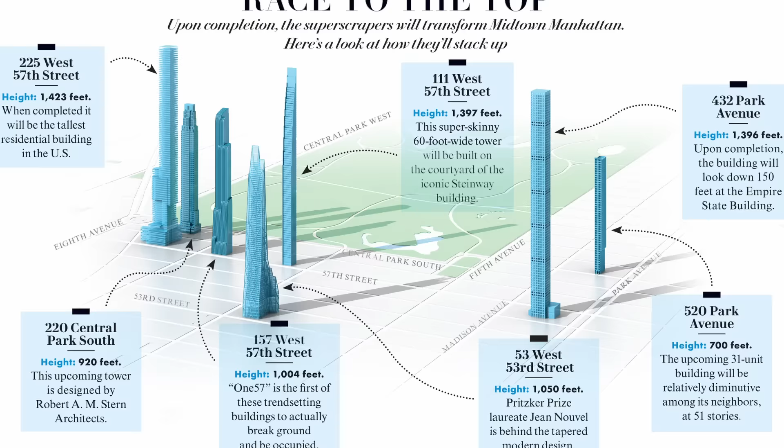If there's one place on Earth where skyscrapers define ambition, it's New York City. And in Manhattan, right along Central Park, a row of ultra-luxury towers has come to symbolize both incredible engineering and spectacular problems. Billionaires Row isn't a single street, but a cluster of super-tall condominiums lining 57th Street and the blocks just south of Central Park, built to attract the global ultra-rich. Apartments here can sell for tens of millions, but just as often, they sit empty.

Billionaires Row has seen record-breaking designs, but also lawsuits, bankruptcies, and towers that sit half-empty. From the creaking walls of 432 Park Avenue to sluggish sales at Central Park Tower, these skyscrapers are as controversial as they are ambitious. And at the very center of this skyline stands one tower that takes the idea of ambition to an entirely new level.

Steinway Tower. A skyscraper that cost more than $2 billion, took 12 years from planning to completion, and somehow managed to become the world's thinnest skyscraper. The fourth tallest building in the United States, and somehow one of its loneliest.

How? Let's find out. The 2000s and 2010s marked a new era for Manhattan's skyline. Developers weren't just competing to build tall, they were competing to build thin. It all started with One57 in 2014, followed quickly by 432 Park Avenue in 2015, a tower so slender it became a global talking point. Together, they sparked the creation of what would soon be nicknamed Billionaires Row, a cluster of ultra-luxury towers along the southern edge of Central Park.

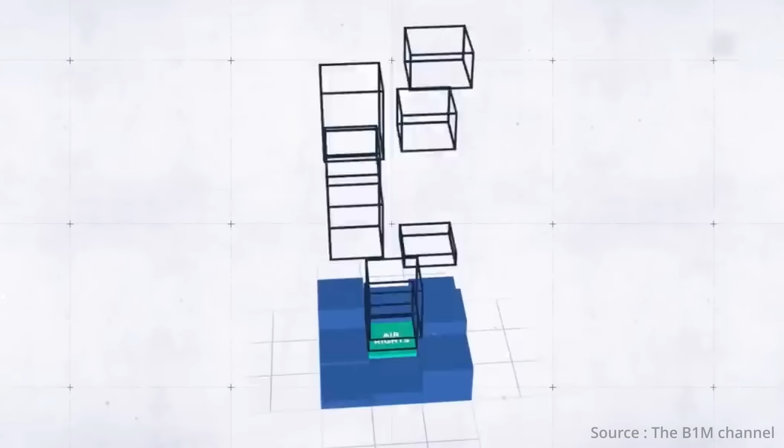But why here? The answer was money. In the years after the global financial crisis, international wealth, from Russian oligarchs to Middle Eastern royalty, poured into Manhattan real estate. These apartments weren't really homes, they were treated as safety deposit boxes in the sky. Developers saw an opening, and thanks to a 2013 zoning change that allowed them to buy air rights from surrounding low-rise buildings, they could suddenly build higher and thinner than ever before.

That's where Steinway Tower comes in. Unlike other towers that started from a clean slate, this one had to rise out of a historic landmark, Steinway Hall. Designed in 1925 by Warren and Wetmore, the same architects behind Grand Central Terminal, the building had to be preserved. Instead of demolishing it, developers designed a super-tall tower that would incorporate the landmark and rise from its light court. But here's where things get extreme.

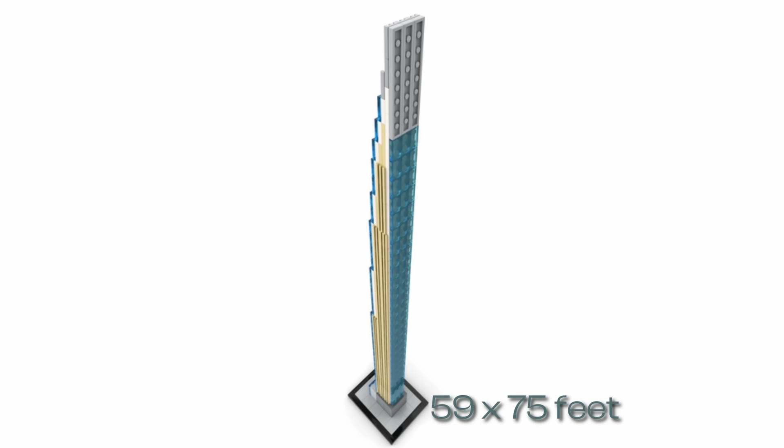The Steinway Tower's footprint is just 59 by 75 feet, smaller than many suburban houses. And yet the plan was to make it soar to 1,428 feet in height. That makes it not only the world's thinnest skyscraper, but also significantly taller than the Chrysler Building at 1,046 feet. In fact, Steinway Tower ranks as the fourth tallest building in the entire United States. All of that on a base narrower than a townhouse.

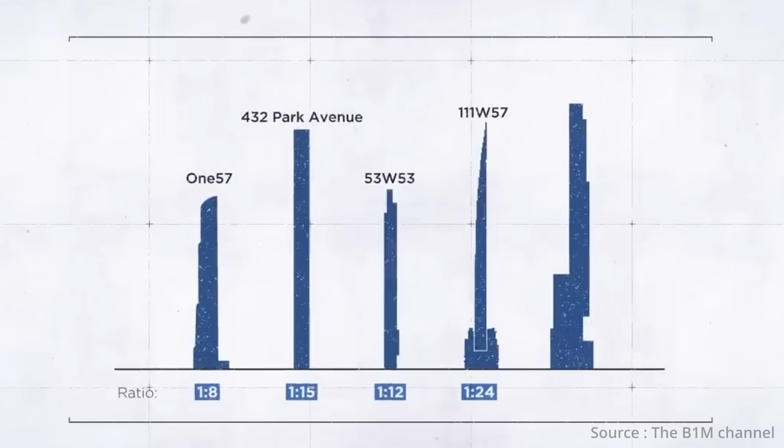A height-to-width ratio of 24:1, meaning the tower is 24 times taller than it is wide. It wasn't just financially risky, it raised the fundamental question: how do you keep a tower this thin from swaying or collapsing? To find out, engineers drilled nearly 200 steel anchors up to 100 feet into Manhattan's bedrock, creating a foundation thick enough to hold the impossible. But anchoring was just the first step. The real challenge was still waiting above ground.

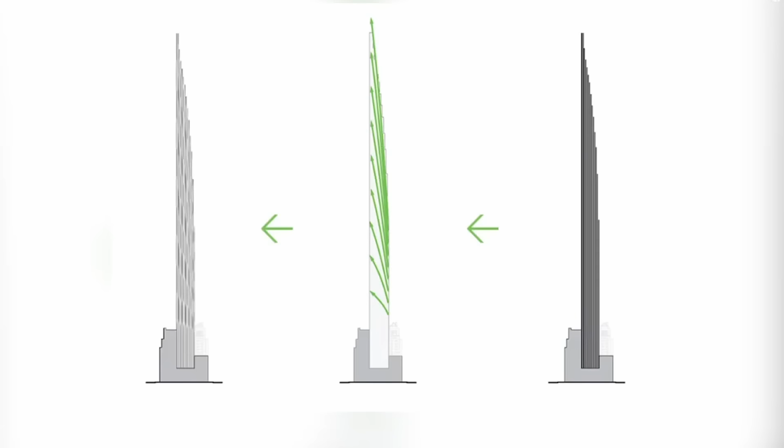How do you keep a tower this thin from being torn apart by the wind? At 1,428 feet, the problem isn't just gusts pushing against the structure. It's something called vortex shedding, swirling air currents that can set a building swaying until it cracks itself apart. For Steinway Tower, with its extreme slenderness, this wasn't just a concern. It was a potential death sentence.

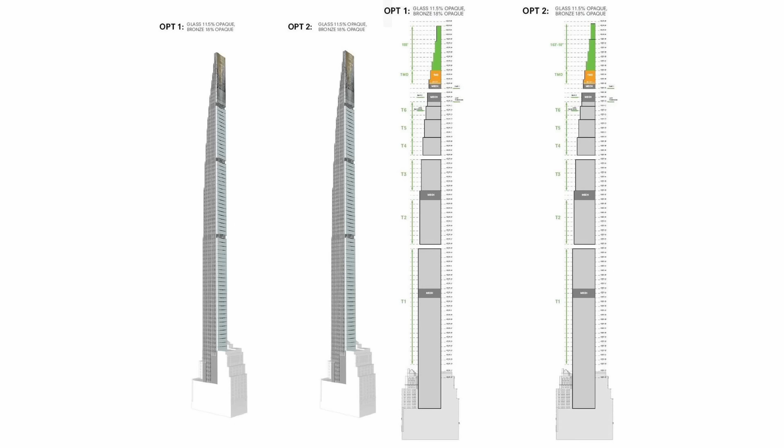So, engineers did something radical. They designed the building to let the wind straight through. On the 51st, 71st, and 86th floors, entire sections were left completely open so that air could pass freely through the structure. By breaking up those dangerous wind patterns, the tower could stand tall without shaking itself to pieces.

And this wasn't the first time Manhattan had to fight the wind. In 1978, the Citicorp Center nearly faced catastrophe when engineers discovered diagonal gusts could topple the whole building. The fix? A secret overnight retrofit that reinforced more than 200 joints while tenants slept, plus the installation of New York's first tuned mass damper, a 400-ton block sliding at the top of the tower to counteract sway.

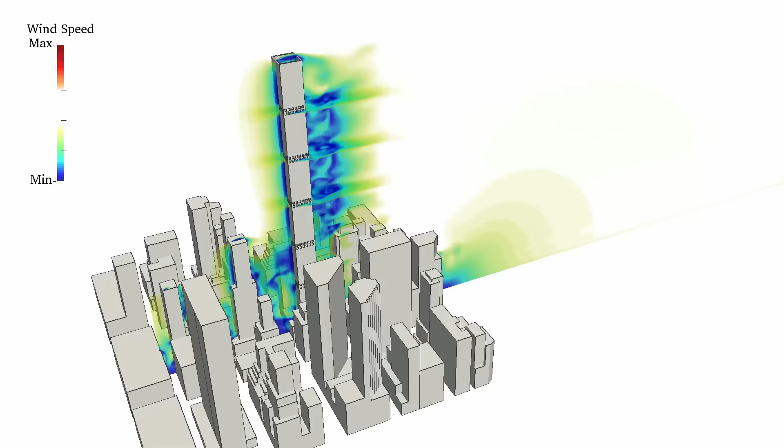Even 432 Park Avenue, another Billionaire's Row giant, relies on open mechanical floors every 12 stories to cut down wind forces. But at a 15-to-1 height-to-width ratio, even that building still creaks and groans so loudly in storms that residents have called it intolerable.

Steinway Tower had to go further. With a 24-to-1 ratio, it's nearly twice as slender as 432 Park, meaning every solution had to be pushed to the absolute extreme. That wasn't enough on its own.

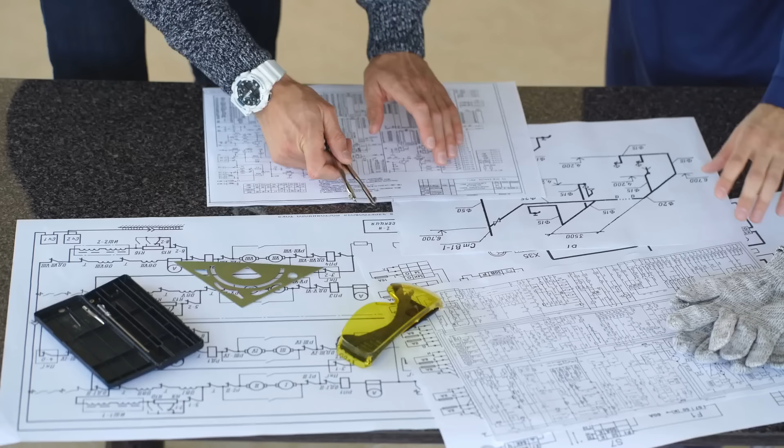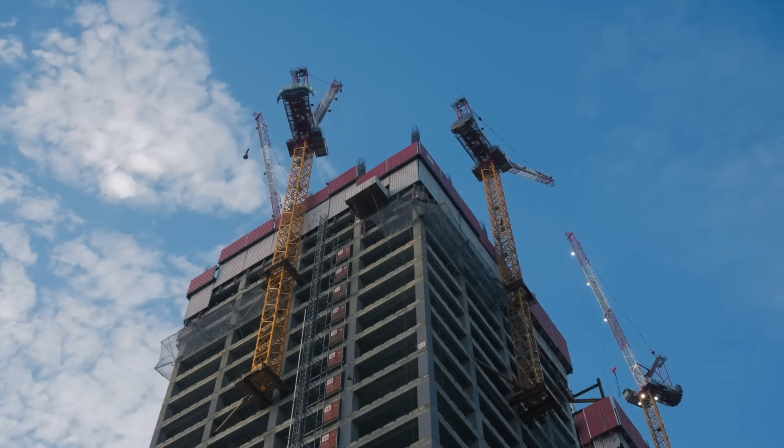Steinway Tower also needed some of the thickest shear walls ever built in a residential tower, 30 to 36 inches at the base, tapering to 16 inches higher up. And these weren't ordinary walls, they were poured from 14,000 psi ultra-high-strength concrete, nearly twice what most skyscrapers use.

Finally, the team added a series of outrigger trusses, giant steel and concrete beams that tie the central spine to the outer walls. Imagine a ship's hull flipped upright, holding the structure steady against nature itself. Even with all this, the top floors still sway several feet during storms, a reminder that in buildings this extreme, compromise is part of the design.

By 2021, after 8 years of construction and more than $2 billion spent, Steinway Tower was complete, an engineering triumph in every sense of the word. But the bigger question remained, would anyone actually want to live there?

Every dream feels good until the real-world rules apply to it, and Steinway Tower was no different. Instead of eager buyers lining up for $30 million condos, sales stalled. In fact, the tower went through 3 different sales teams in just 6 years. By 2022, developers claimed nearly half the units were sold, but those were mostly contracts, not closings.

By the time keys were handed over, only a fraction of deals actually stuck. By 2023, 2 years after its completion, the tower was pretty much empty. That raised the question, what went wrong? The answer was money and lawsuits.

But here's the contradiction. For all that opulence, much of the tower remains empty. At night, many floors are completely dark. Only 2 units in the Steinway Hall base have ever been leased, renting for up to $75,000 a month. The rest? Still waiting for occupants.

Even with the recent bump in sales, the building still feels eerily quiet compared to what it was built to be. And that contrast has given Steinway Tower its enduring reputation. An engineering marvel filled with luxuries almost nobody uses.

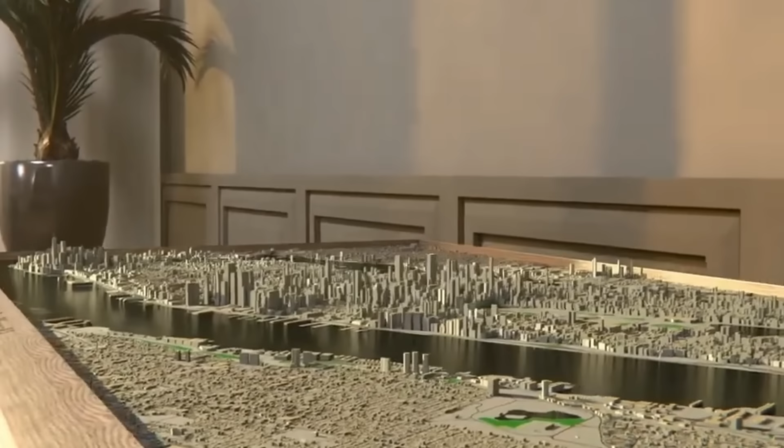Across Billionaires Row, nearly half of all luxury units remain empty. They were never really meant to be homes. Instead, they became what critics call safety deposit boxes in the sky, places for the ultra-wealthy to park money, not live in. Russian oligarchs, Chinese billionaires, Middle Eastern royalty. This was the global audience developers were chasing.

But while those towers rose, the rest of New York was facing a very different reality. In 2023, luxury residential sales fell by 40% compared to the year before. At the same time, the city's average rent hit record highs, leaving millions of New Yorkers struggling to afford a place to live, even as $50 million apartments sat dark and unused.

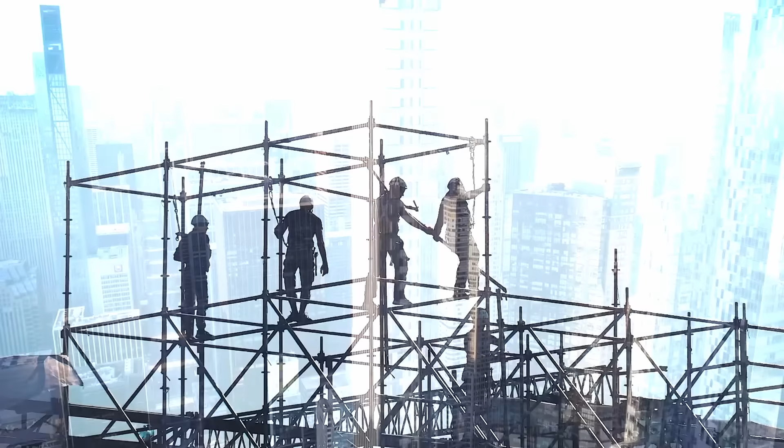And that's the contradiction. Projects like Steinway Tower generated thousands of construction jobs, but in terms of actual housing, they've added almost nothing. A billion-dollar skyline for the few, while the many wrestle with a crisis on the ground.

It was supposed to be the pinnacle of ambition, the world's thinnest skyscraper, 12 years in the making, a $2 billion gamble. Instead, it's become a reminder that even the most daring feats of engineering can fail if they're built for speculation instead of people.

So the question remains, would you want to live in the world's thinnest skyscraper? Or was Steinway Tower doomed from the start?